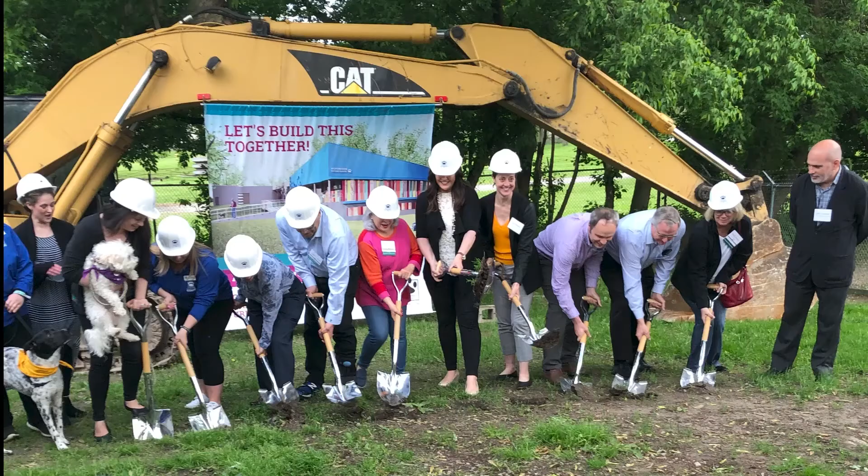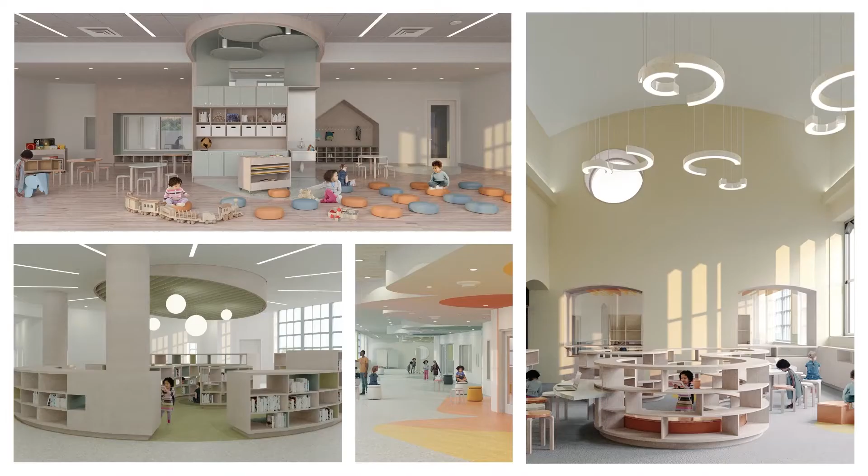Founded in 1999 as Ply and reimagined under the new partnership of Craig Borum and Jen Maigret in 2016, Ply Plus is a collaborative architecture practice dedicated to design excellence with an experimental approach to design research and creative invention. We work across a wide range of project types, often helping bring an architectural expression to the visions of our institutional and community partners. The work that we will share with you today reflects our team's expertise as it is elevated by our close engagement with our clients, consultants, and the tradespeople whose knowledge expand the scope of what is possible when working collectively. We have learned that approaching projects in this manner yields quality that exceeds typical budget expectations and enables the successful implementation of complex first-time projects.

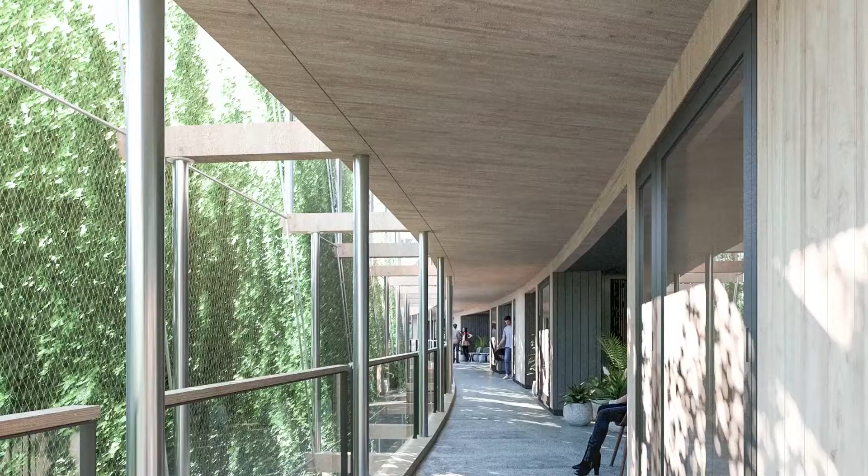We take great pride in the work that we do and are so grateful for this opportunity to invite you to join us for a short journey through Southeast Michigan to visit 3 of our recent projects that exemplify our broader body of work.

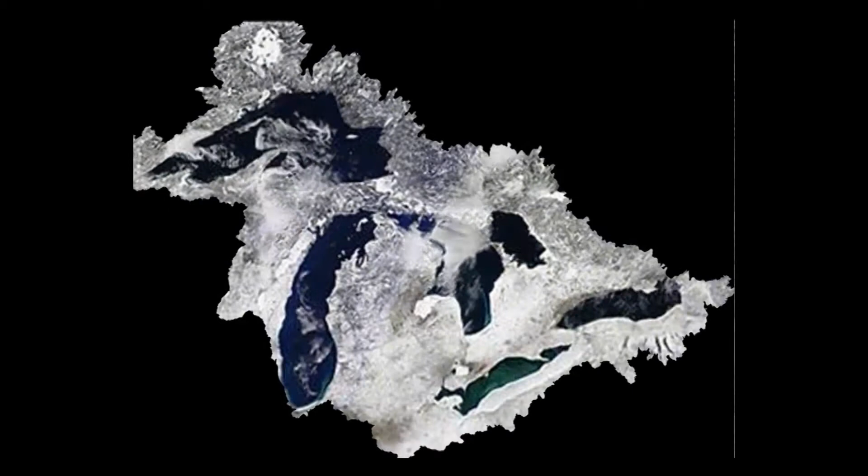Practicing architecture in the Great Lakes Basin of the Midwest situates our work both geographically and culturally. Geographically, we live in an immensely important watershed, home to 40 million people and the world's largest freshwater system. The natural features of this territory have profoundly shaped the urban patterns and processes that establish the context for past, present, and future architectural innovations.

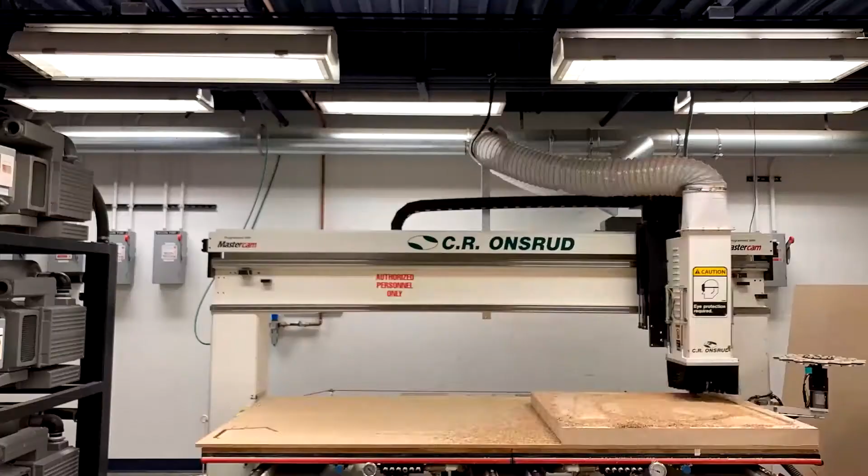Culturally, the ubiquity and dynamics of industries throughout the region embody a gritty ethos of making that inspires our practice from design conception through construction. The legacies of industry are complex and often challenging, yet they also have produced a notable philanthropic character and important institutional anchors. This is a vibrant and spirited region that inspires our dedication to design excellence and the uniquely local community-focused visions that contribute so much to our experience of place.

MOCAD is a young institution that presents exhibitions and programming around contemporary, visual, literary, music, and performing arts, connecting Detroit to the global art world while simultaneously serving the city as a free and open place to meet, learn, and build community. Located on Woodward Avenue and Garfield, between Detroit's downtown and its cultural district, the museum is an innovative addition to Detroit's vibrant Midtown neighborhood and the Sugar Hill Arts District. It has become an important hub for the exploration of emerging ideas in the contemporary arts.

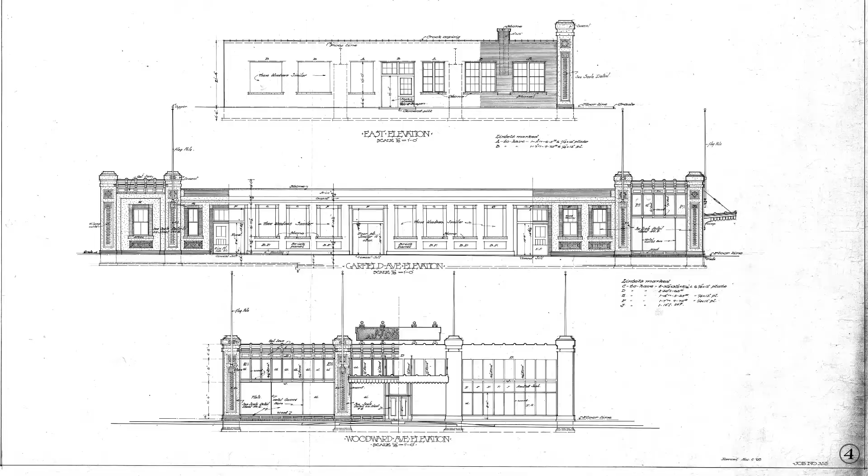The 22,000 square foot building was originally designed in 1906 by Albert Kahn as one of the first auto showrooms in Detroit. After numerous other uses, the building was renovated in 2006 by Andrew Zago Architects into the new museum, while maintaining its palpably historic and gritty character. With its raw, flexible, and long-span spaces, the building is well suited to the exhibition of contemporary art.

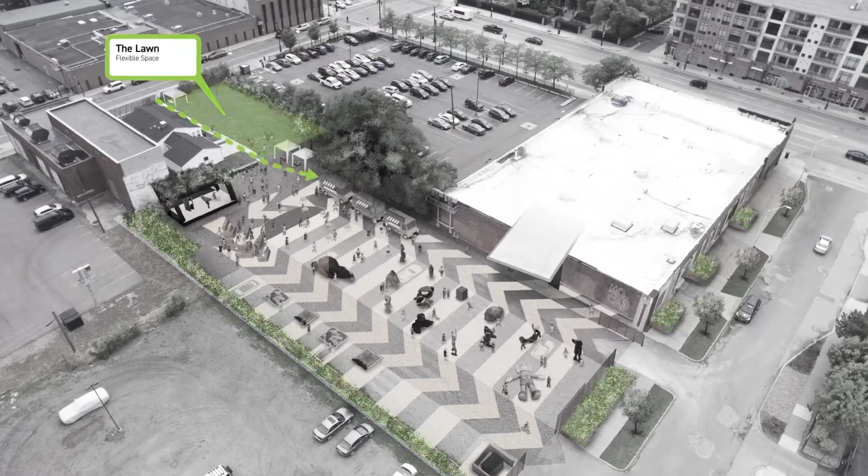Our initial task was to transform the underdeveloped parking lot of the museum and Mike Kelley's mobile homestead site into a cohesive campus. Our design opens a new connection through the block, creating a continuous pedestrian pathway and a new outdoor performance space. This presented an opportunity to reorient the museum entrance to the performance space, integrating MOCAD into its urban context. Much of our work involves upgrading and providing new infrastructure that the museum currently lacks.

From a heating and cooling system that brings air conditioning and humidity control to the museum for the first time, to stormwater management strategies that provide a visual marker of environmental improvements. In each case, our goal is to leverage these improvements to enhance the art and community programming of the institution.

Arts programming at MOCAD has always made use of the full extent of its building and site. Outside events include art performances, installations, as well as a summer concert series and youth events. Our design simply gives these activities more spatial presence and support. Our design reconceives the current parking lot as an event plaza that accommodates parking, while utilizing graphics that prioritize the legibility of its use for outdoor events.

The renovation work includes improvements to the building as well. These include reopening a portion of the Woodward Avenue facade, expanding the existing bar and cafe to allow for full restaurant service, renovating the existing restroom to provide all gendered use, and designing a new entry canopy off the plaza.

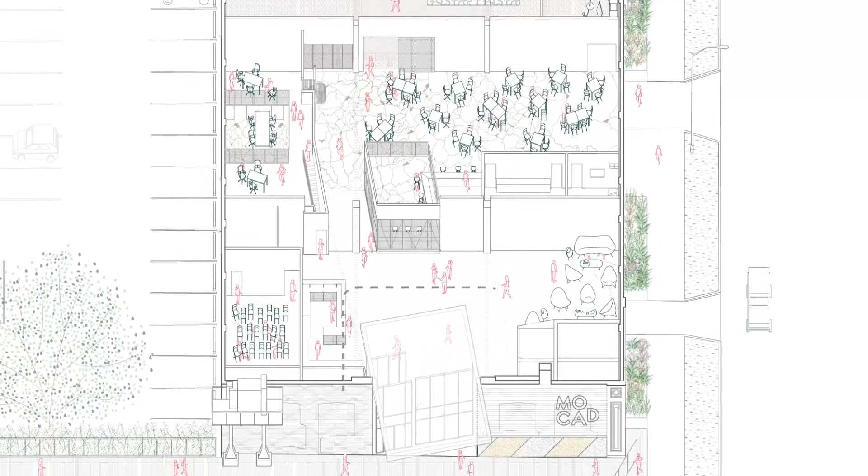Perhaps the most important change is the relocation of the main entry from Garfield to a location that directly connects with the new plaza and pedestrian corridor. This change increases the porosity and transparency between inside and outside and allows the energy of the arts programming to flow across the site. The new entry transforms the building's rough utilitarian backside into a prominent facade for an important cultural and urban hub.

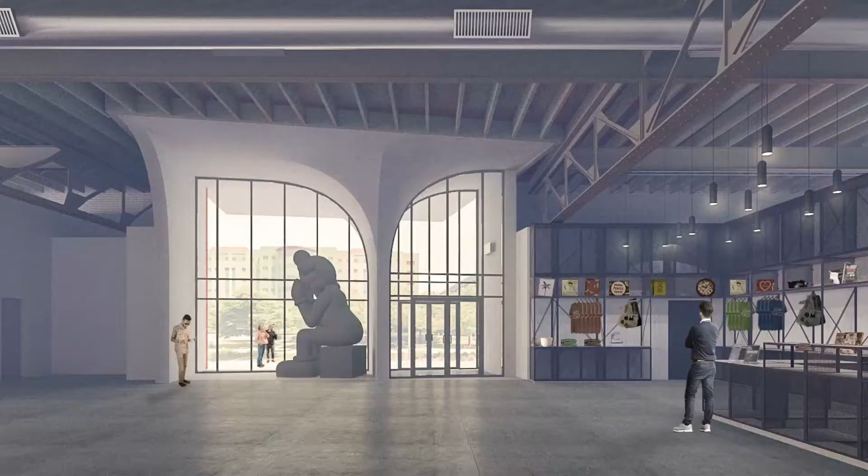The new cantilevered canopy evolved in response to a series of complex and shifting constraints. These include the integration with existing structure and space limitations driven by utility easements.

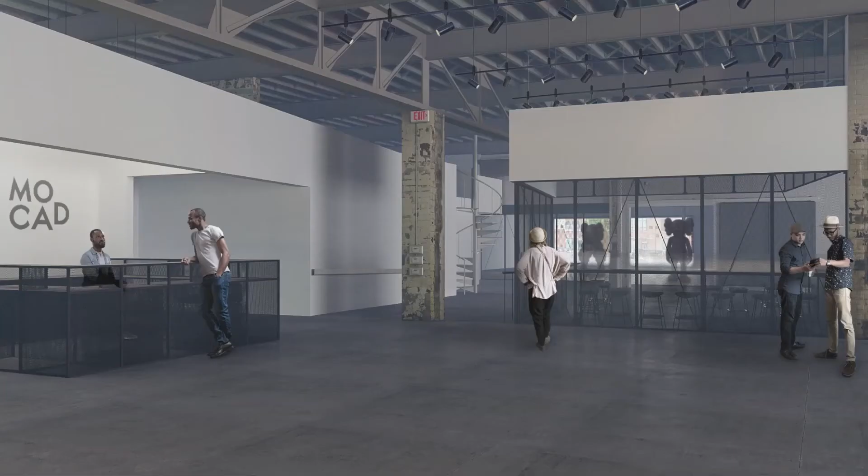The interior renovations are strategically surgical and often strip away existing layers to enhance the raw character of the industrial space, while carefully positioning refined elements that enhance the visual connections between the museum and the city.

Infrastructural improvements to the environmental systems and enclosure are also carefully designed to achieve a more contemporary standard of performance. They are carefully integrated to recede into the background in order to highlight the work of artists and performers and community members alike.

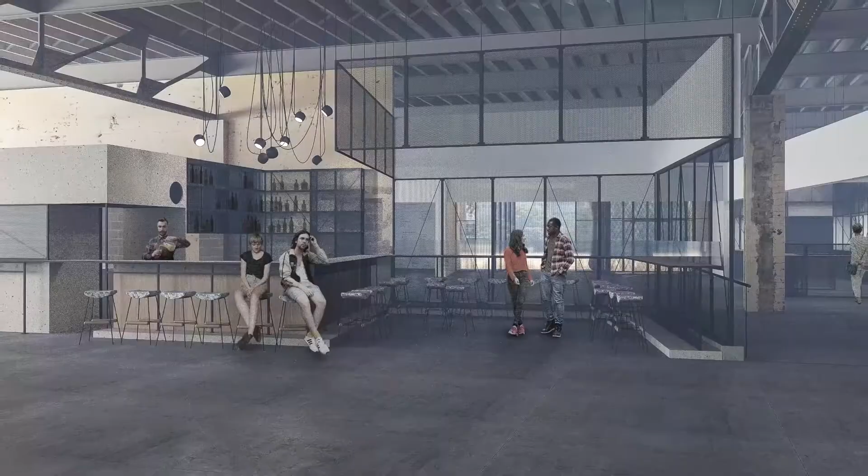Strategic cuts have been made between the three main areas of the building, revealing a layering of spaces that draws the public through them, from Woodward to the new event plaza.

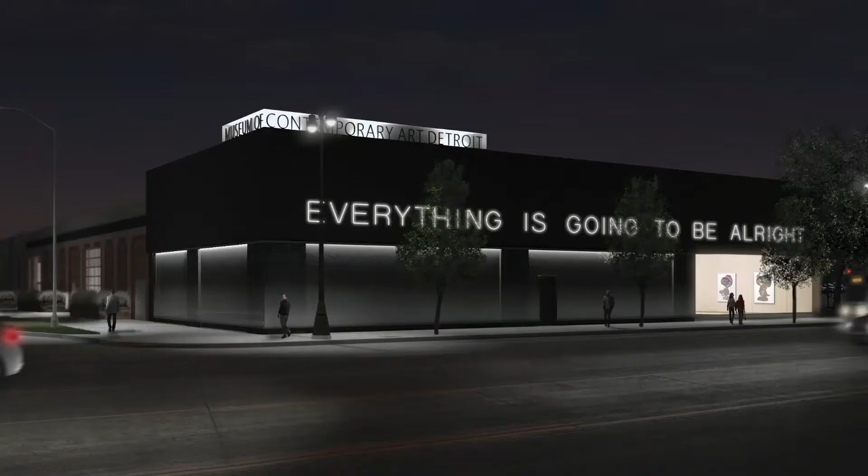Finally, the Woodward windshield is a return to the level of visual connectivity the building was originally designed to achieve as an auto showroom, inviting the city into the museum and reopening the glass facade that had been bricked in, closing it off for so long.

The drive along Woodward Avenue from MOCAD to MARL offers some important insights into the legacy of industry in our region. Woodward Avenue is Detroit's most iconic radial road, running 27 miles from Detroit to Pontiac.

First formalized after the Detroit Fire of 1805, Woodward Avenue made history when it was converted to the first mile of concrete highway in 1909. Within 7 years, its entire length was paved, and Woodward became the cultural center of the Motor City.

Woodward is also the site of the Ford Piquette plant, where the Ford Model T was developed, and Ford's first moving assembly line in Highland Park.

Further north on Woodward, the Cranbrook Academy was established as a site dedicated to arts and crafts education, and a counterpoint to Ford's advancements in automation.

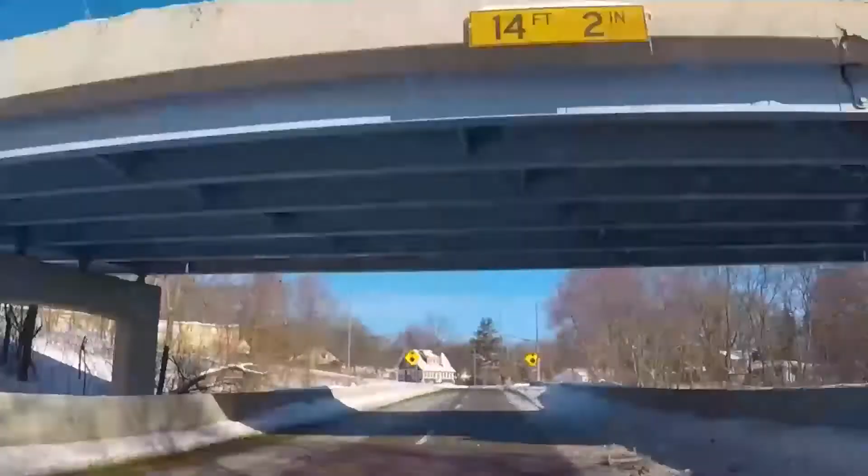The debate between the values of life represented by city versus countryside and production versus craft have an ongoing influence to this day. Our own approach to this history is to adopt a both-and attitude and explore the opportunities that arise from the depths of tradition in making through digital fabrication and handcraft.

The Michigan Animal Rescue League is one of Southeast Michigan's most established animal shelters, serving the community since 1953. The new building replaced an undersized and outdated structure that served as a shelter for almost 60 years.

The transformation from old to new looked to balance some of the attributes of the previous shelter that were valued by the staff and community, including an approachable and welcoming scale and the use of MARL blue.

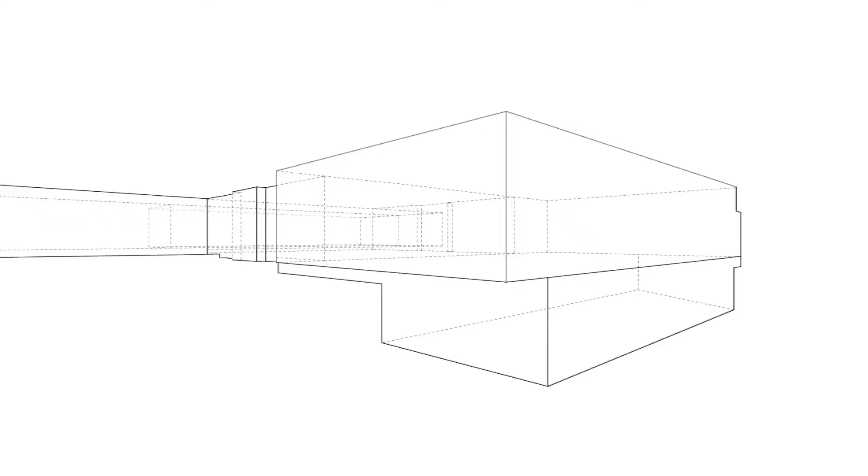The new construction expanded the space given over to animal care, including the addition of a dedicated medical wing, thereby greatly enhancing Marl's ability to achieve its mission of being a community leader in nonprofit animal welfare and providing the highest quality of life to dogs and cats through rescue, medical care, short and long-term sanctuary, adoption, education, and outreach.

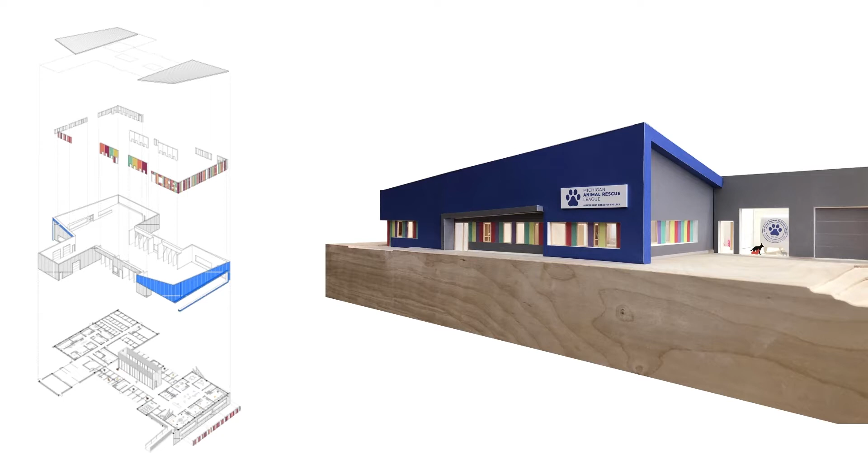We worked in close partnership with Marl's amazing design committee, with an eye to the role that architecture can play in improving the quality of the wait for a forever home and achieving a different breed of shelter.

The topography of the site drops from north to south, which allowed us to organize all of the animal care spaces on a shared level and to tuck an administrative suite of offices and conference space underneath the new southern entry. The adoptable cat wing is organized along the southern facade of the building and provides 3 rooms with custom cat condos and a cage-free cat room.

The windows in each room are animated with activity as the cats explore the custom wood shelves and perches that provide continuous routes of movement or sunlit naps.

The dog neighborhoods occupy the center of the building and are organized around an open courtyard space. Each neighborhood provides indoor and outdoor space for 4 dogs, including a shared outdoor play space for each group of 4. Inside, the neighborhoods are separated by doors to minimize the acoustic transfer of sound, thereby helping eliminate triggers that can elevate the stress levels of dogs and staff alike.

Finally, the north wing of the building follows the footprint of the previous shelter by reusing the existing footings. It provides a dedicated intake entry and medical spaces for exams, surgery, recovery, and holding.

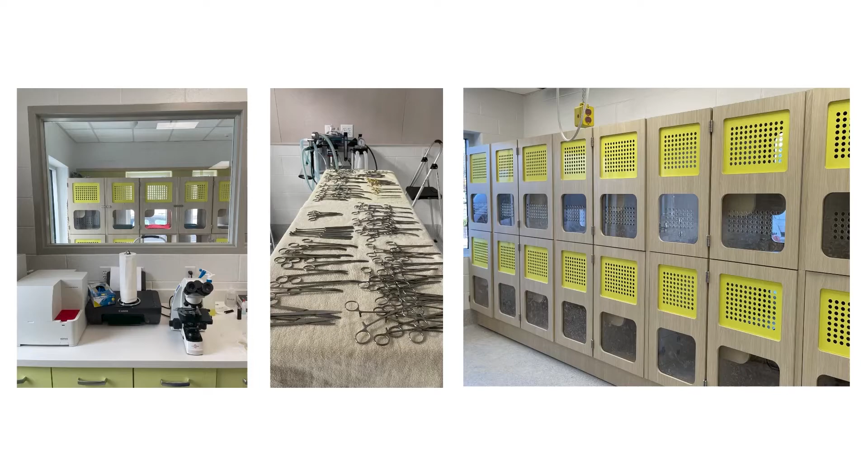The building design deploys a strong use of color to maintain Marl's community identity while signaling an exciting, forward-looking future with the improved facility. From the adoption entry, visitors are greeted with a main reception desk, as well as views into the adoptable cat and dog spaces.

The development of these spaces was heavily influenced by scientific research in the animal behavior and welfare literature, addressing key spatial and environmental challenges that can lead to unhealthy stress levels for sheltering cats and dogs, including natural light levels, noise levels, and animal housing design that accommodates freedom of movement and choice.

In the adoptable cats room, this led to the design of custom condos that provide airflow, choice of site, and visual openness, and views to outside. Marl has witnessed that the quality of the wait of its animals can greatly improve their future success when adjusting to life with a new family.

Likewise, the building project challenges animal shelter stereotypes by deploying the use of a central courtyard to provide the adoptable dogs' neighborhoods with abundant natural light, acoustic control, and the elimination of nose-to-nose kennels. The environmental control systems include a high rate of fresh air exchange and radiant floor heating for the interior and exterior portions of the dogs' kennels.

Marl has now been open since October of 2020 and continues to provide its full range of services to the community, including adoptions by appointment. Staff have already noted improvements in the post-op recovery rates of its animals, a decrease in stress-induced behaviors, and appreciate many of the same architectural qualities that have the capacity to elevate the well-being of all of its occupants.

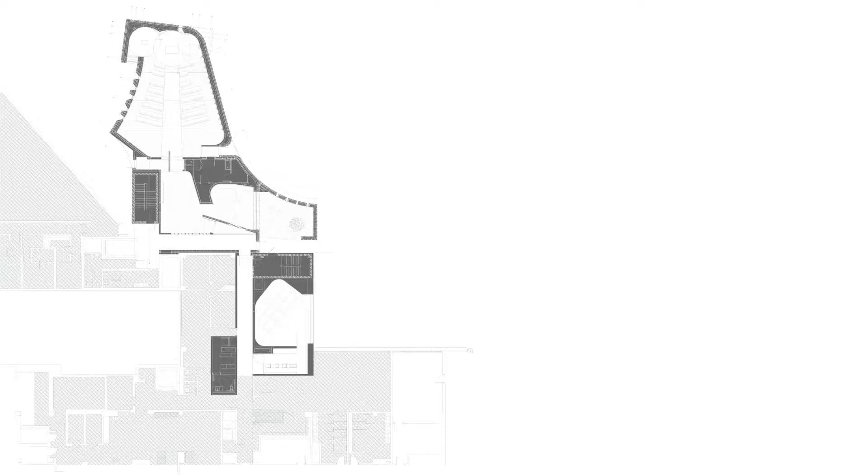The figuration in plan articulates each of the main rooms for worship and reflection, and then is tightly wrapped with a unifying surface, allowing each room its autonomy while uniting them in a singular overall form.

The chapel serves the hospital community as a 24/7 place of prayer, healing, and refuge, as well as providing a daily 6 a.m. Mass. The chapel's apertures match orientations with programmatic opportunities, including a high east window to provide early light for the morning service.

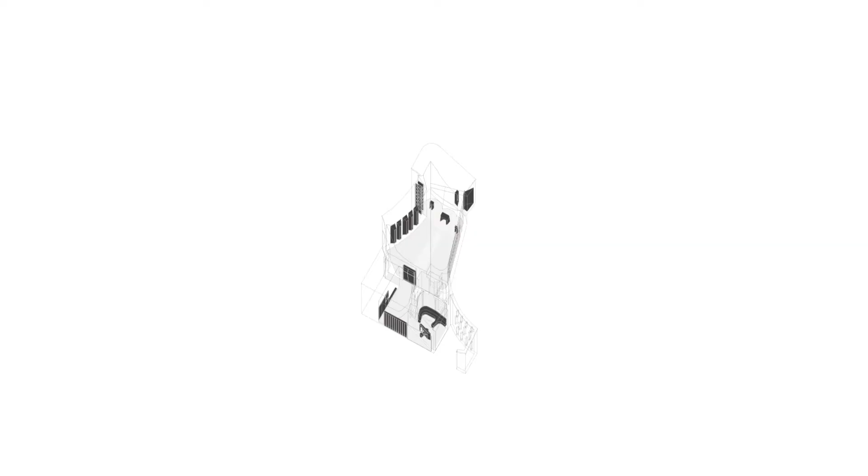The interior walls, ceiling, and door of the sanctuary, as well as the dichroic glass window, are positioned and sculpted to articulate the importance and relationship between the carved stone altar, the tabernacle, and the ambo.

The entry door integrates a blackened steel frame with 2 layers of slightly distorted walnut slats. Positioned in relationship to each other, they create a visual moire as the door moves from open to closed. The material and geometric expression of the door signifies the importance of this threshold, while also allowing visibility into the chapel, welcoming visitors.

The geometry of the conical corner of the chapel celebrates the position of the tabernacle, the most important liturgical element within the sanctuary. The development of the ceiling geometry strengthens a visual connection with the tabernacle, in contrast to the processional axis of the space, which aligns with the solid stone carved altar.

On the exterior, this important corner is accentuated by the patterning of the brickwork and coincides with the tallest moment in the building's silhouette. The complex brick patterning at this corner was intended to accentuate the large, relatively unbroken surface of brick, creating a varied texture that transforms with the dynamic play of light across the day.

The pattern was designed and refined through iterative experiments with both digital and physical modeling. These experiments became the tools we used to engage the masons in a collaborative dialogue that coupled our ability to quickly adapt to shifts in pattern and spacing with our digital tools and the feedback from their tacit knowledge.

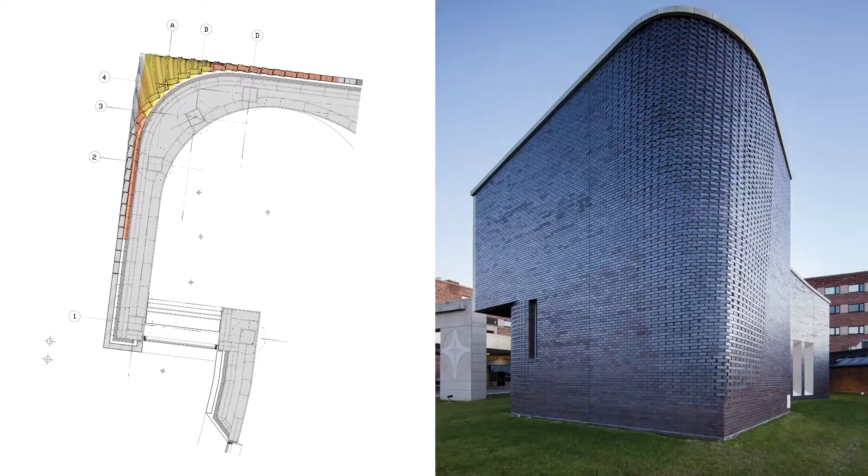This collaboration allowed us to tailor the drawings and information models we produced to streamline their work, making micro adjustments in the head joints of the mortar so that the varied length of each course as it traverses the corner resolves at the termination of the wall in an uncut brick.

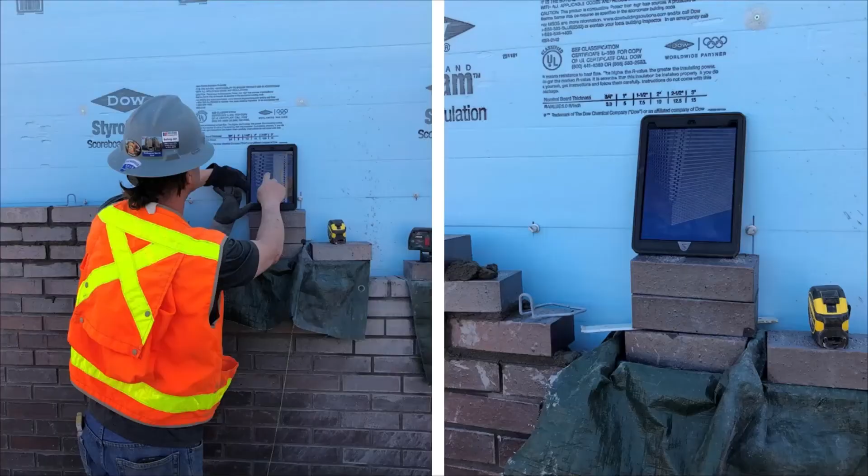This approach also established regions of the wall with consistent patterns of spacing and rotation, yet visually yields a gradually shifting pattern. Here's Mike Piazza, the head mason for Davenport, with one of the digital models we organized by brick course on his indestructible iPad.

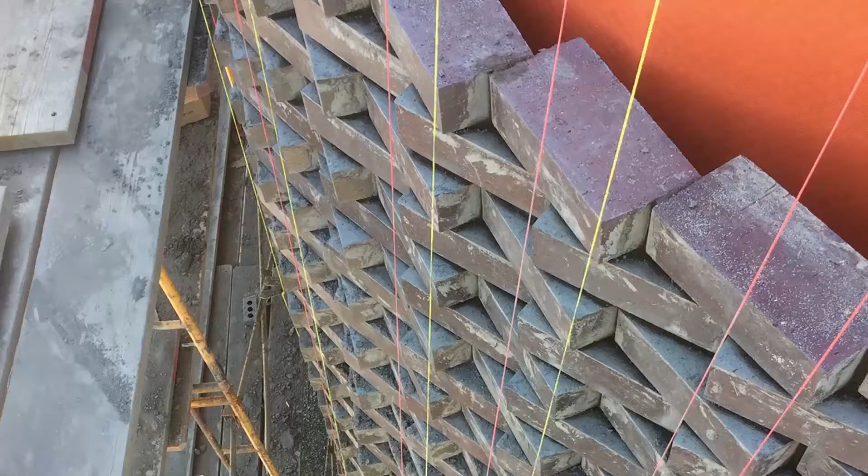This model allowed him to give us live feedback course by course as they made minor field adjustments that we could then calibrate back to our models as the work progressed. From Mike's end, he brought skill and ingenuity to staging and establishing methods to facilitate consistency in the pattern across his whole team of masons.

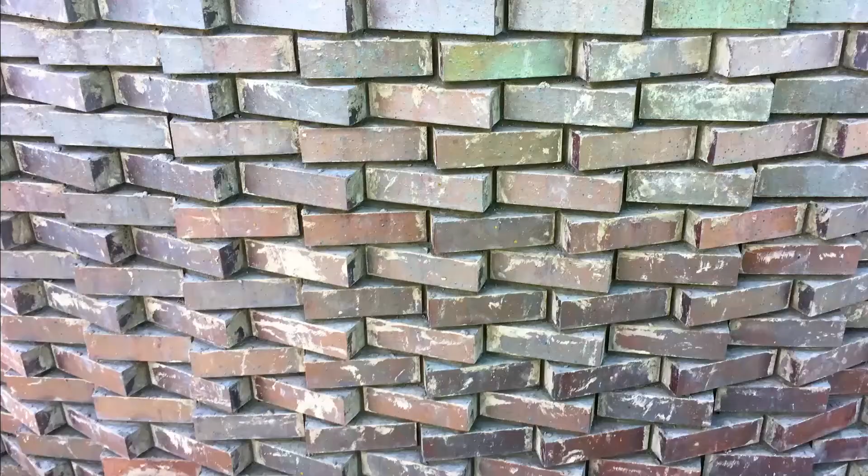Using the mason's trusty string line, but instead of horizontal calibration, they deployed them vertically across the facade, establishing the leading points of rotated brick.

This is one of several aspects of the project that are extensions of ongoing design research into environmental performance and digital fabrication workflows, and give important spatial and material expression to the overall design, and ultimately to the way the space and the architecture is experienced.

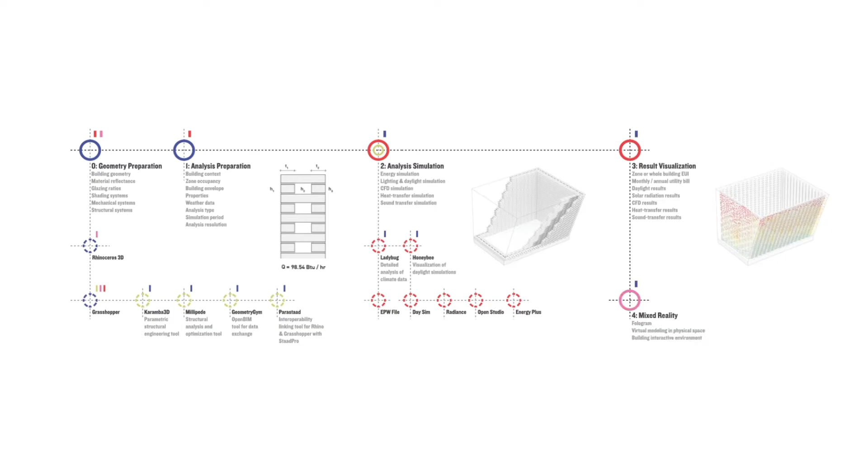In reflecting on these efforts and the productivity of collaboration necessary to realize the conical corner, we have embarked on a research project through the Taubman College Prototyping Tomorrow grant program, bringing together the power of digital tools and the craft and skill of the masons to produce a more robust workflow.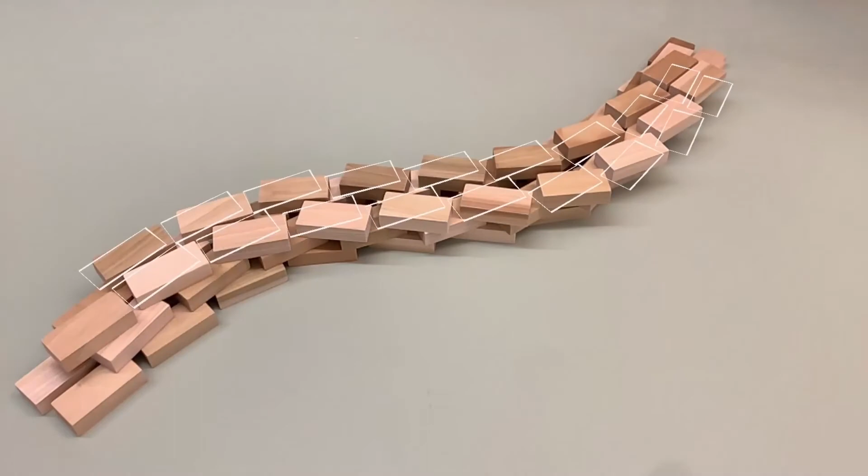We hope that by combining 3D parametric modeling, BIM, and mixed reality technology using Fologram for HoloLens with the tacit knowledge base of the masons, we can achieve the potential to enhance our workflow, linking evaluative feedback analyses across multiple software platforms to iteratively refine a range of brick bond and lithe patterns that simultaneously achieve a high level of energy performance, structural autonomy, and the necessary protection against water and vapor penetration as a building envelope.

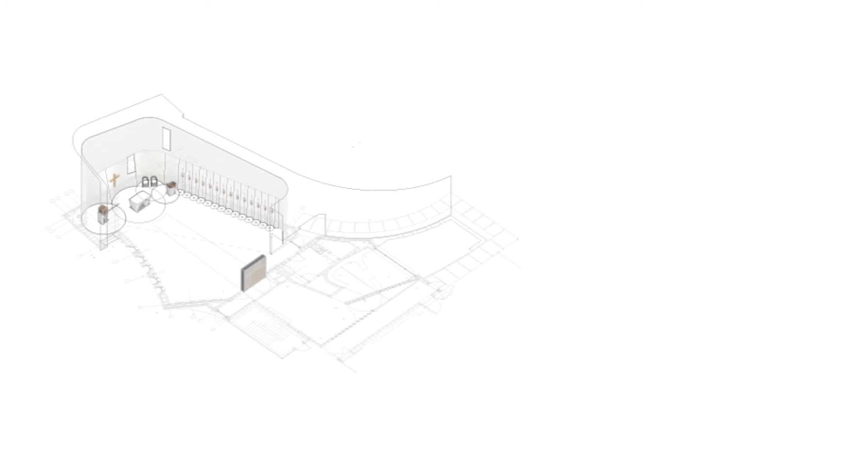Back inside the chapel, the three primary liturgical elements, the tabernacle, the altar, and the ambo, became a project within the project. These elements complement the geometries of the building and were each carved from solid pieces of dolomitic limestone.

The three elements were fabricated by Quarra Stone in Madison, Wisconsin, using the digital models we produced to guide the robotic carving.

With our clients and the team from Quarra Stone, we traveled to Upper Wisconsin to select the individual blocks of stone we would work from, looking at the grain of veining and the integrity of its mass for evidence of fissures before extraction. Back in Madison, we worked with Quarra Stone using 3D prints as shop drawings prior to turning the robots loose on the stone.

The chapel's ceiling geometry was developed to inscribe an experience of intimacy and scale while establishing an important focal point on the tabernacle. The tabernacle is visited throughout the day by the hospital's lay ministers to transport the Eucharist to those patients too ill to attend a Mass in person.

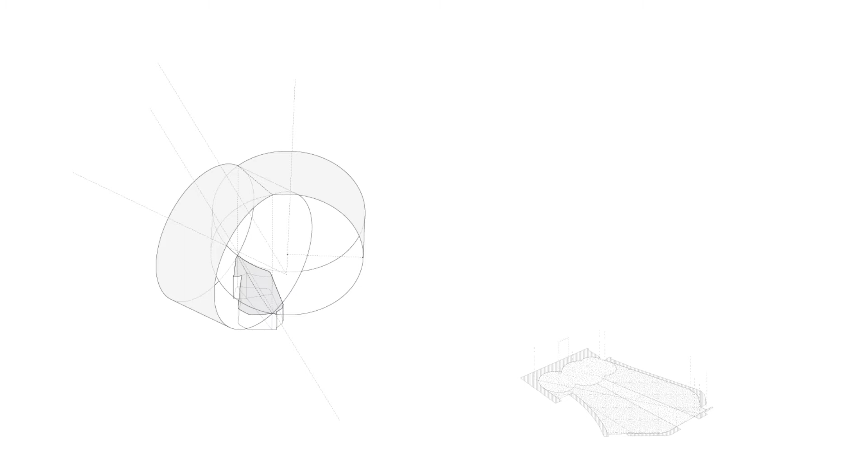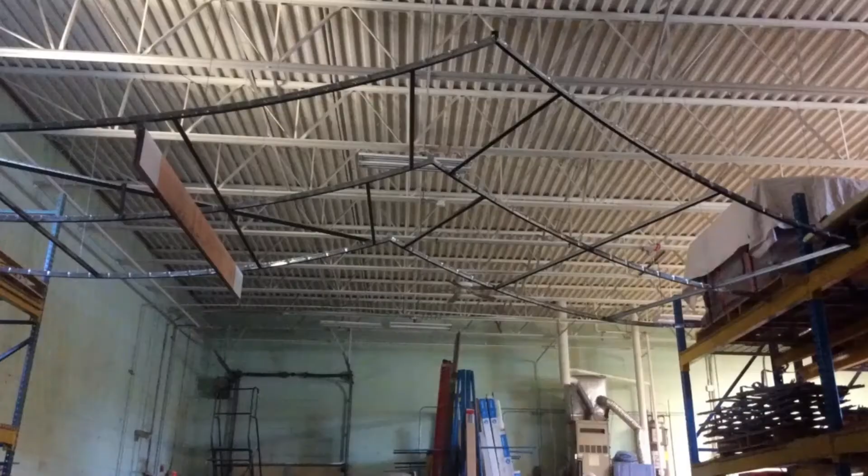The diagonal axis of the ceiling brings a visual importance to this function and balances the more traditional axes inscribed in the terrazzo floor. We constructed a scaled physical model to study this geometry, which informed our selection of ceiling products able to provide a continuously perpendicular relationship between the ceiling slats and the floor to assure that the systems above the ceiling were obscured from oblique views.

Of all the custom elements, however, the dichroic window garnered a special importance to the project when it was sponsored by a group of hospital nurses in honor of a colleague who they lost that year.

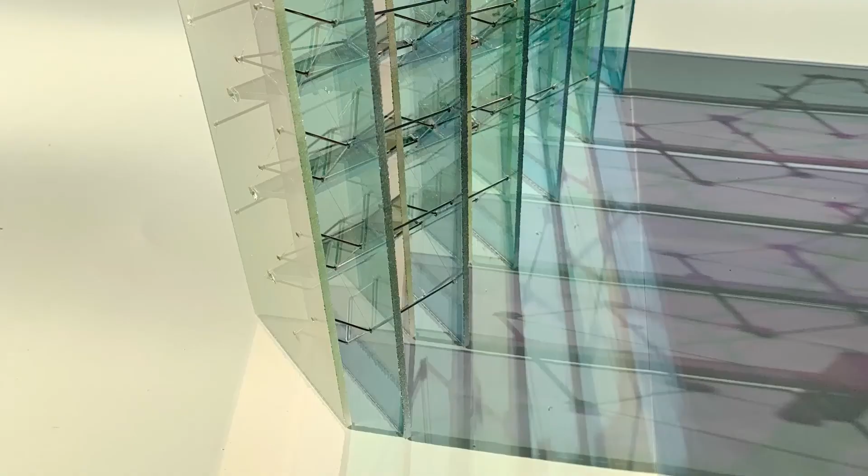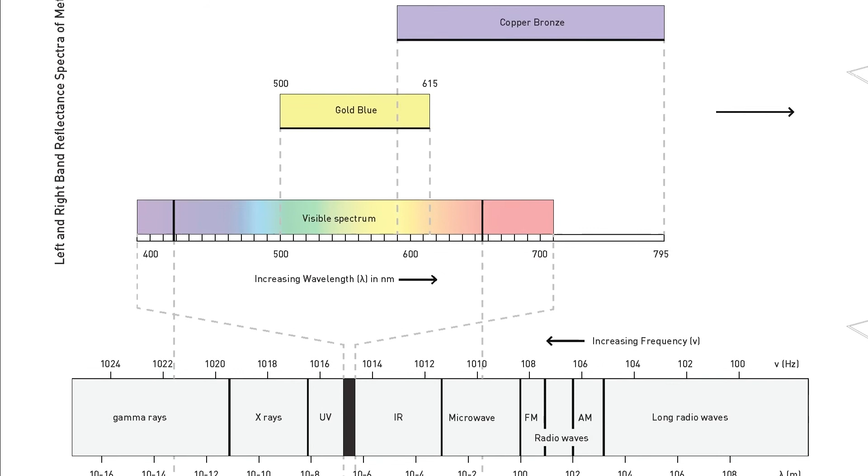A previous research grant, funded by Taubman College of Architecture and Urban Planning and Guardian Glass, enabled us to study an environmental application of dichroic glass and develop a specific recipe that aimed to take advantage of its capacity to reflect colors of the visible light spectrum in controllable directions.

This knowledge translated to the chapel through the deployment of a laminated glass application of dichroic glass, along with the design of a custom steel framework that organizes the two dichroic films at angles and spacing that maximize the range of colors produced across the seasons.

The visual effects recall the rich color qualities of stained glass windows, while adding a dynamism to the movement of light across the curved walls of the sanctuary.